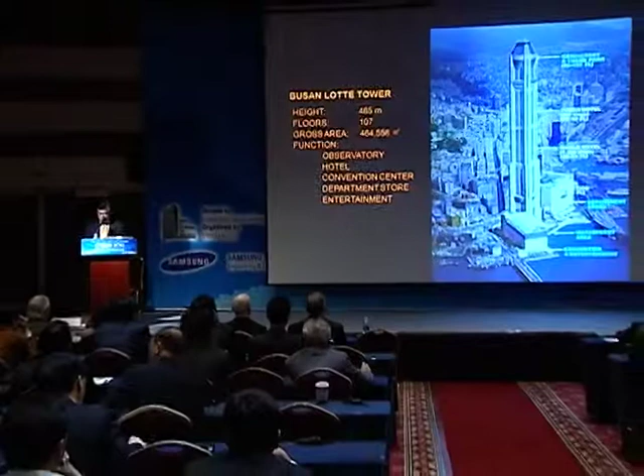The project location is the historical old CBD in Busan metropolitan city, facing the South Sea and Busan Harbor, which is the gateway of Northeast Asia. It was launched in 1994 as the city decided to develop the old town in Busan, especially after they moved the city hall, which became the site of this project.

The project was designed as a 465 meter tall, 107 story tower for 2 hotels with an observatory on top of the building, with a theme park, and 2 blocks of podium for a convention center and department store.

We started this great project with passion. However, there was not enough information, nor guidelines set up. At the time, even Wikipedia was not born, so there was no way we could get information about high-rise buildings at the time.

With a huge amount of effort, we completed the DD phase with local engineers. I think it was possible because of the friendly support of foreign engineers like SWMB, now renamed MKA. It really was a very valuable challenge for Korean architects and engineers.

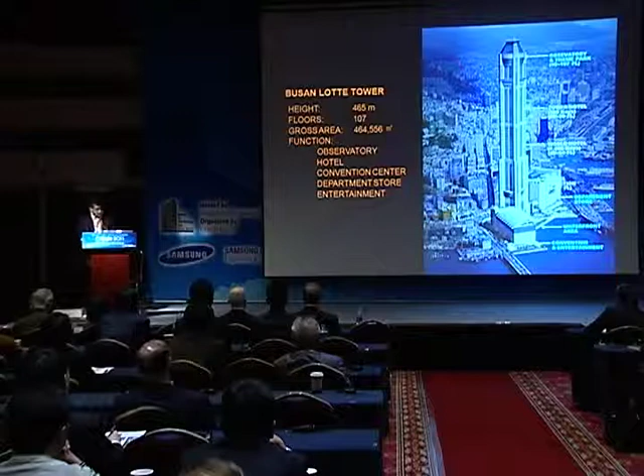During the building permit process, which lasted for 4 years, we had quite an amount of hardships, mainly because the local building code and regulations didn't define super tall building requirements. There was almost no regulation or guideline adapted to this kind of building at the time. However, the building permit was granted.

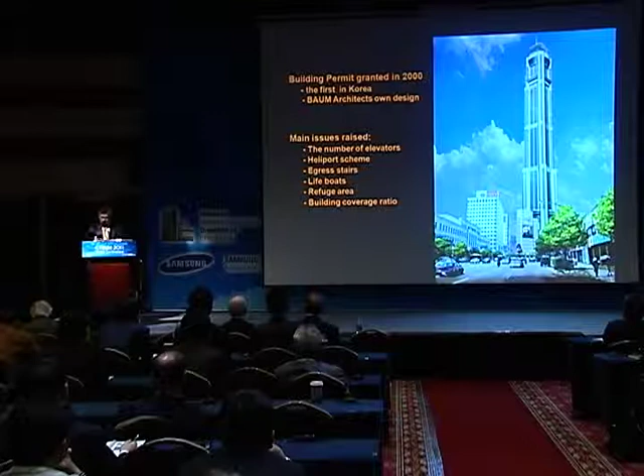It was the very first time in Korea with more than 100 stories. The date was 11th of November, 2000. Some attendees here may recognize that date, 11th of November. It was the same date we got the building permit for the Jamsil Lotte World Tower, the topic project of this session. It's a really interesting coincidence.

Especially the Korean attendees here may recognize the date as Pepero Day. So now I'm holding this. From 11/11, we Koreans call the date Pepero Day, and actually this famous cookie is from the Lotte Confectionery Company. So I think it's a very amazing coincidence.

I believe all the trial and errors we underwent served as the foundation to improve the Korean building code, as well as general confidence in tall buildings in Korea. Now, the department store of this project has been open for business since December 2009. Currently, the tower scheme has changed shape for the 5th time with the fourth design architect on board, and its physical location moved to reclaimed land from the sea.

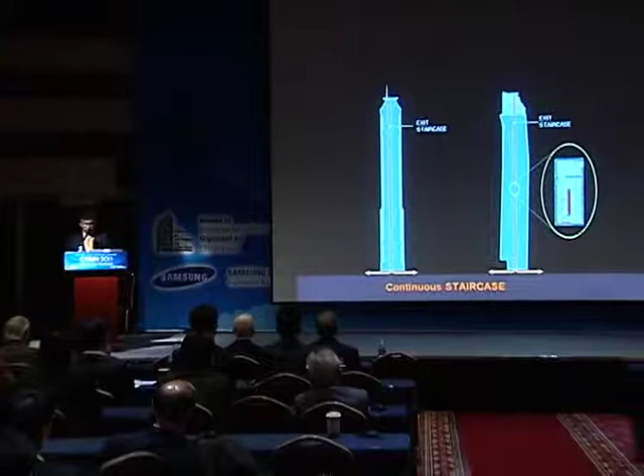The old building code required the egress stairs to be connected directly from top to ground level. As you may see in the left diagram here, the egress stairs of the Busan Lotte Tower had to be continuous to conform to the code requirement, until the code was revised later. As more information was gathered and understanding of key issues in super tall buildings improved, they allowed a partition wall in the staircase to prevent the stack effect, as shown on the right.

Kind of a ridiculous case. However, it was difficult to maintain the effective width for egress over the narrow landing, as you may guess. Moreover, the stair doors would not open easily due to the air pressure difference on each side of the partition wall. Now it's totally changed, so we don't need this anymore.

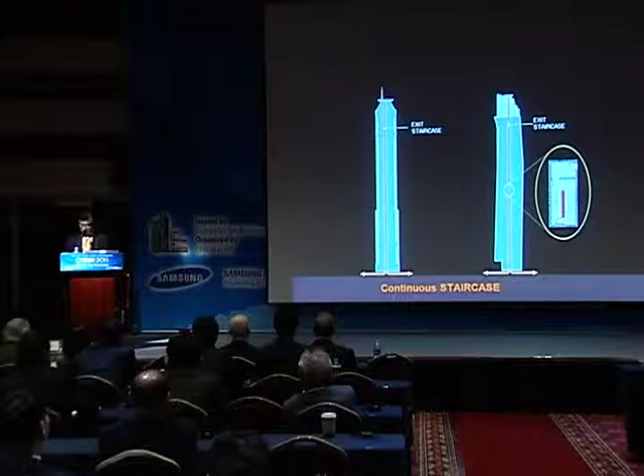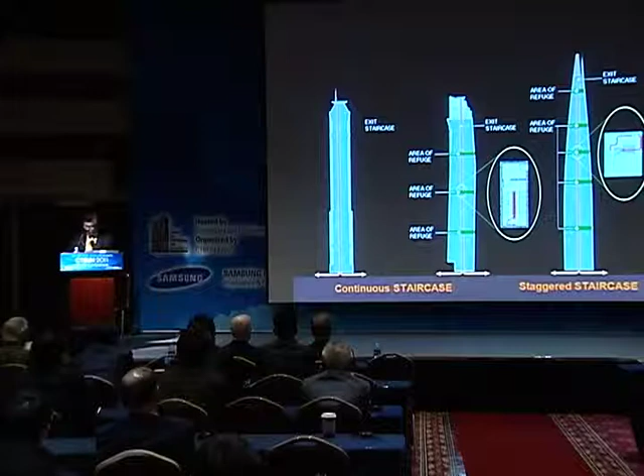In 2009, the Korean building code was revised. It contains the definition of super tall buildings, and the installation of refuge areas became a mandatory item. In Jamsil Lotte World Tower, shown on the right, refuge areas are provided with egress stairs connected directly to the area, and the egress stair shafts are discontinued, preventing the stack effect.

Third issue: there should be huge chaos and panic if all occupants were to use the stairs only in case of emergency. This is the reason to consider the lifeboat running down to refuge floors as an essential safety element. There was no understanding of the essential need for the lifeboat at the time.

The only requirement was specially equipped fireman's elevators when we were trying to get the first building permit. During the total revision of the project with new foreign design architects hired by the client, we took the chance of improving the safety of this project.

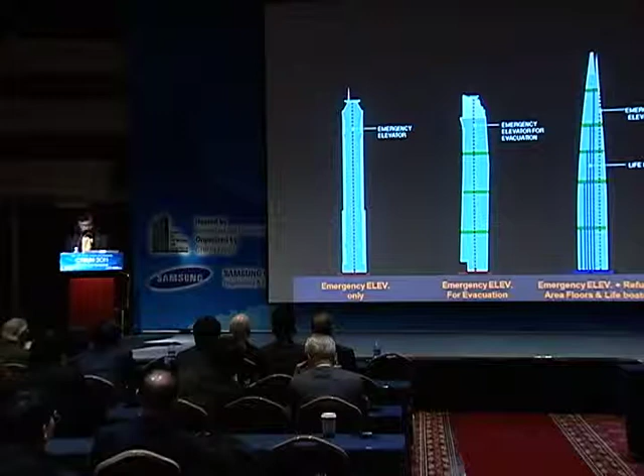Lifeboats are to run between each refuge floor to the evacuation floor directly, as you see here.

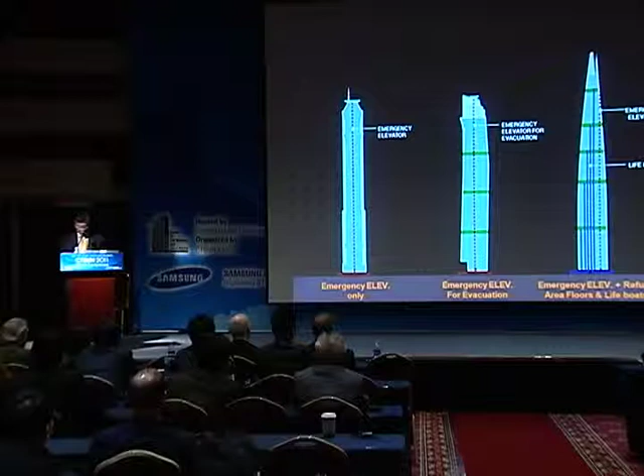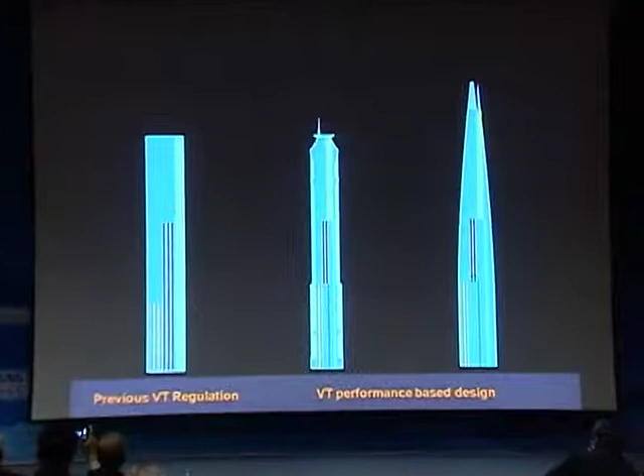Fourth issue. Based on the old building code, a lot of the Korean attendees here may remember, all vertical transportation should reach the main egress floor. Yes, maybe tens of elevator shafts might fill the ground floor, leaving almost no area even for the entrance lobby.

So the total number of elevators was the only requirement at the time. So we appealed for the need of a new calculation method based on the use and occupancy of each space—in other words, performance-based calculation—and thankfully it was granted at the time.

Otherwise, this project should have disappeared entirely, and I wouldn't be here in front of you today. Since then, Korean building code regarding the vertical transportation system in super tall buildings has been mitigated to allow performance-based design. This year, the city of Seoul set up a specific guideline for the vertical transportation system in super tall buildings.

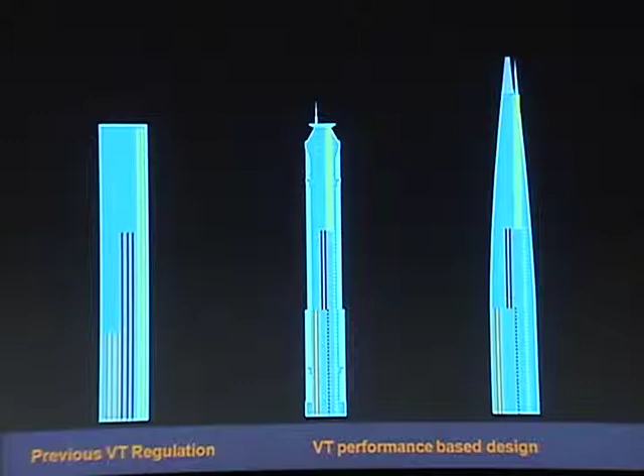Fifth issue. The controversial heliport was a mandatory item for buildings over 11 stories and a certain size at that point. As shown here, all Korean tall buildings were designed to accommodate a heliport on top, while cases in other countries were free from that shape, providing various outstanding symbolic shapes.

During the building permit process of Busan Lotte Tower, we appealed seriously, and now, thanks to the building officials who understood the value of design and who finally recognized the high risk of landing a helicopter at that height, a heliport is not mandatory anymore. So we are free from that kind of shape.

And one last issue. By designing a super tall building, it is my understanding that we architects are proposing a multiplex city to the public, the citizens, the neighbors, and the town. I think I'm right. The preliminary scheme of Busan Lotte Tower was to accommodate multiplex city functions on the site.

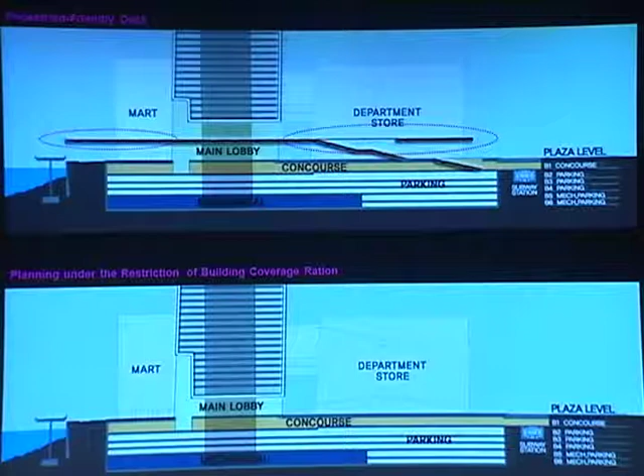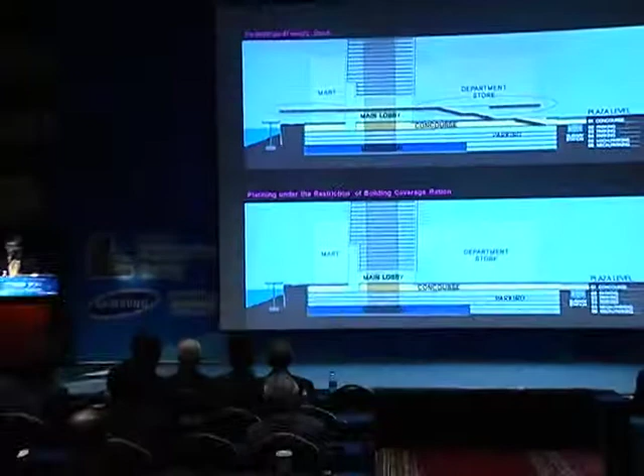We proposed three-dimensional circulations to improve accessibility and the surroundings. However, this dynamic three-dimensional pedestrian deck above ground level was considered building area, making the overall scheme exceed the allowed building coverage ratio.

As shown in the diagram, we had to step back to a common two-dimensional circulation system to get the building permit, unfortunately. It is my opinion that we need to revise the regulation or provide more room for variance to improve safety and amenity for pedestrians on the ground, especially when trying to build high-rise buildings.

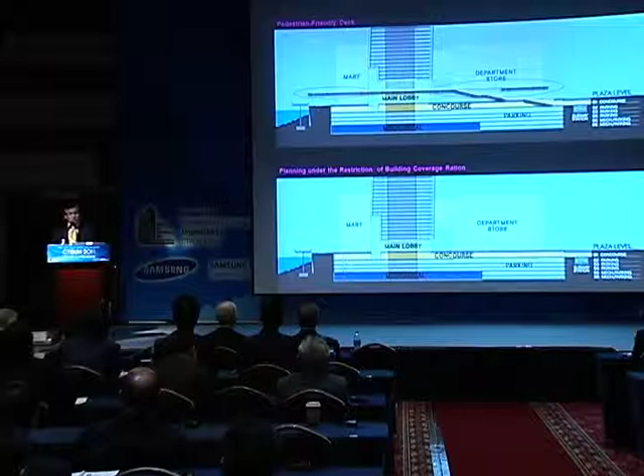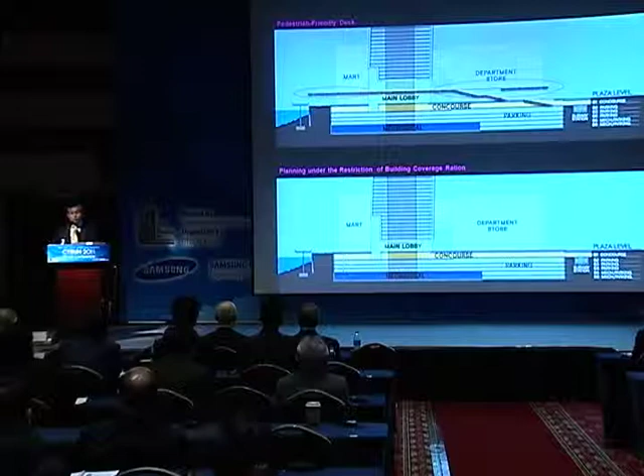We need to make much more effort to make the surroundings of super tall buildings enjoyable, especially to reduce the overwhelming impact on pedestrians. That's what my long-time comrade James expressed before about the low part of the Jamsil case.

Now let's walk into the status and progress, my final talk on super tall building projects in Korea. As I stated before, the super tall building project in Korea started with Busan Lotte Tower in 1994—17 years ago. And more than 13 projects in Korea have been underway since the early 2000s.

Unfortunately, due to the ongoing global recession, most of them are having difficulty with financing, and lots of them are reducing in scale or being canceled, while we are expecting a group of masterpieces at the Yongsan site.

Nevertheless, the Jamsil Lotte World Tower and the Global Business Center, the headquarters of Hyundai Motors Company, are making good progress toward completion. I am so proud of my firm and my members for doing a major role in these two projects, with my friend Jamie of KPF, on both gorgeous projects.

I'm sure these two buildings will start the first page of super tall building history in Korea. Thank you for listening.